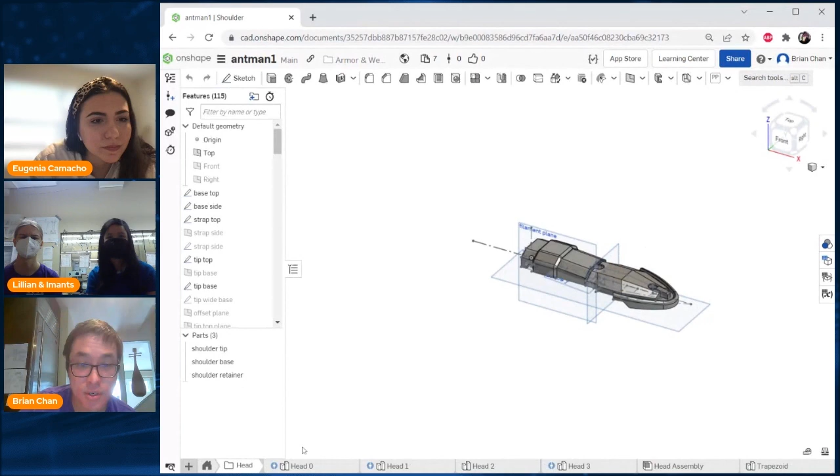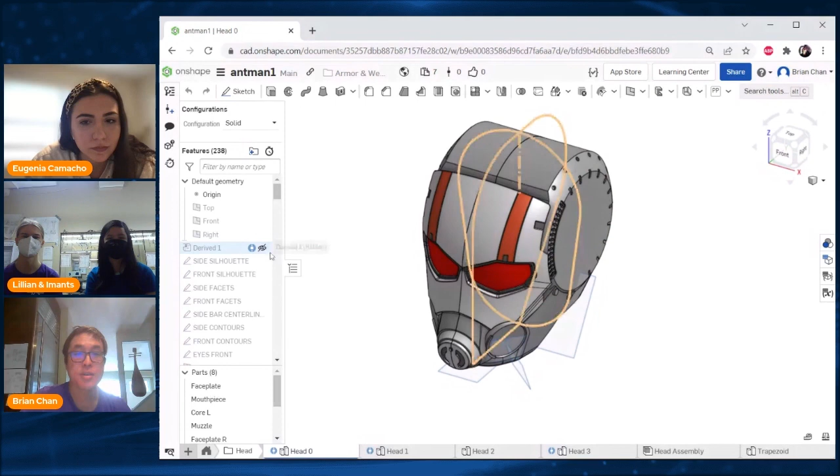So this is a little piece of hardware that fits on his shoulder. I have them in different folders. This is the overall assembly. And I've split them up into multiple part studios because there's just so much stuff, like visual greeble is what they call it in the movie industry. So if you look here, they'll just highlight as they go, right?

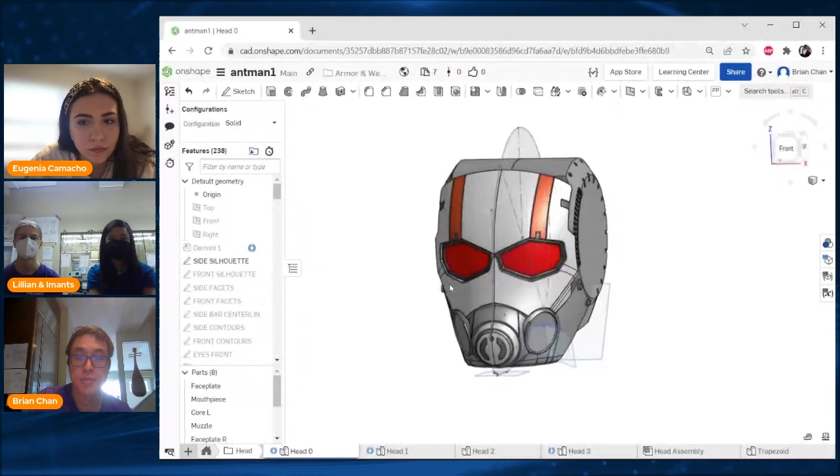So I have very simple starting forms. This is the side view, the front view, and then I call them facets, which is sort of like the lines that make up the shape. That would include like ridges, and later on I'll have a drawing for the eyes as seen from the front.

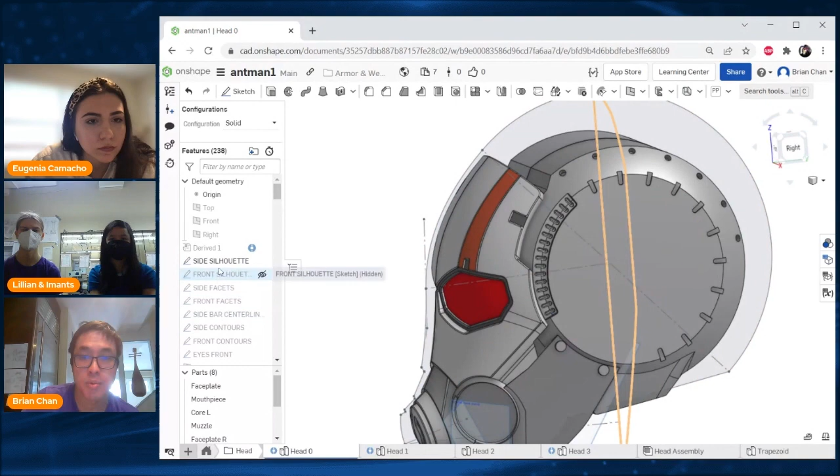So by going from 2D into 3D rather than trying to form 3D curves as composites early on, I can see at a glance early on in these early sketches whether it matches up to the proportions I want. And then only later do I worry about how do I loft it, how do I extrude things, and offset little details like this. Early on, these details are not even in the drawings.

This is an approach kind of like how they used to teach how to draw things, like animals—you put in the simple ovals and the backbone first, and worry about the details later. I'm trying to apply that approach to how I CAD.

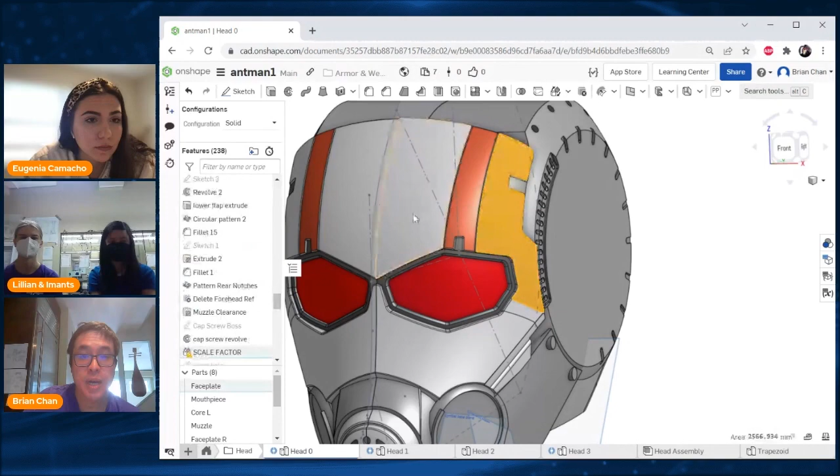And what ended up being the most challenging part to design for this helmet? I'd say it's this mask front faceplate. In the original concept, it's a very smooth forehead, but then there's this very distinct ridge in the middle. I tried to make it as one shape, but since the surfacing tools generally need up to four edges, it's either tangent or it's not.

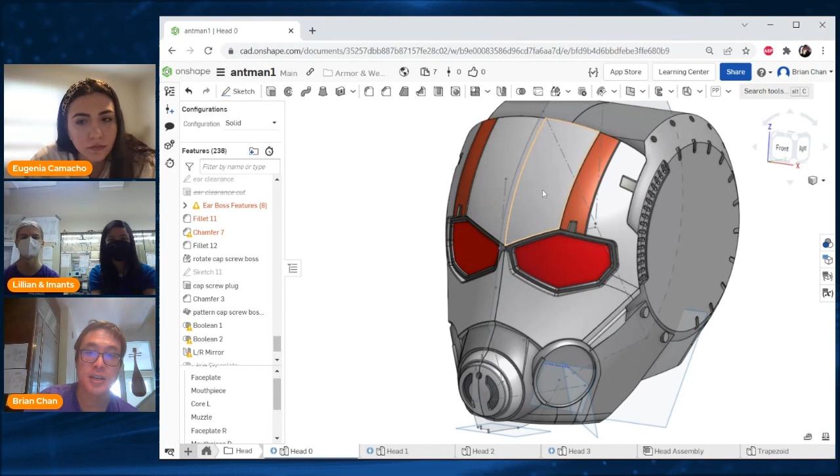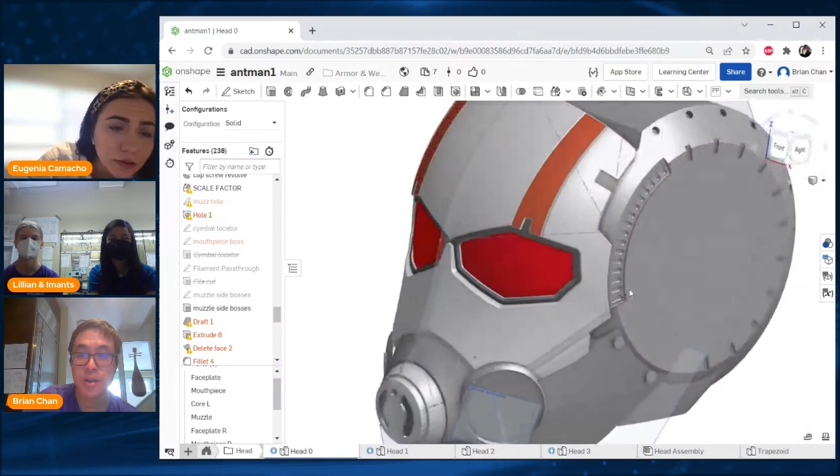I realized I had to split it, but I was able to hide that seam right here with this fillet—when you hide the edges, it's invisible. All the other ones are actually a bunch of shapes, but they're not difficult shapes—surfaces of revolution, and a bunch of extrusions and stuff. But yeah, that main shape was hard to do.

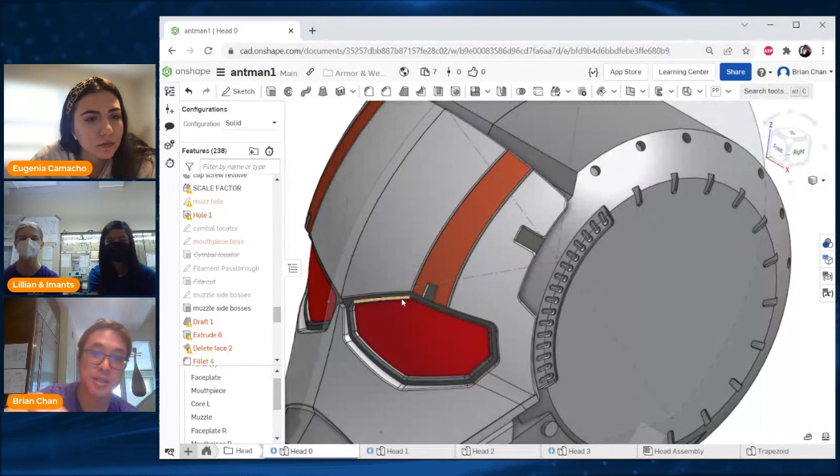And then other things are like, I could create surfaces and then thicken them and subtract that surface in order to create a recess for the eyes, etc.

This is amazing. I'd like to open it up to Richard and Michael if you have any more questions for Brian and his design.

Yeah, this is fantastic, Brian. Thank you so much for sharing it. I love your analogy of the books you use for illustration—I think that's a great approach when it comes to this kind of complex work, and that's really good advice. It really is a sophisticated thing; it's smart to have multiple part studios and derive things. These are techniques that are valid not only in Onshape but in other systems as well, so they're also very good techniques. Thank you for sharing this.

Richard, are you ready to get yourself one of these? You gonna wear it around the Vegas Strip? I wouldn't look out of place wearing it around here—this is Las Vegas after all.

Brian, I'll just reiterate what Michael said about your approach to surfacing. I've spent years trying to learn how to do real surfacing—I'm a mechanical guy, big chunks of steel and socket head cap screws—but one of these days I'm going to finally figure it out, and I'll take some of that advice you gave us and work it into my approach. Thank you for that.

Thanks. Well, one of the things about this helmet is that since I used to design in a mesh modeler, kind of similar to Blender, you can make incredible detail doing things in software like that. But with Onshape, it's actually a mechanical engineering program, so I'm able to put in socket head cap screws, and that's how this thing is put together. It's incredibly modular and still engineering precise, and that allowed me to make the helmet flipping mechanism pretty easily integrated into the design. So it's really the best of both worlds.

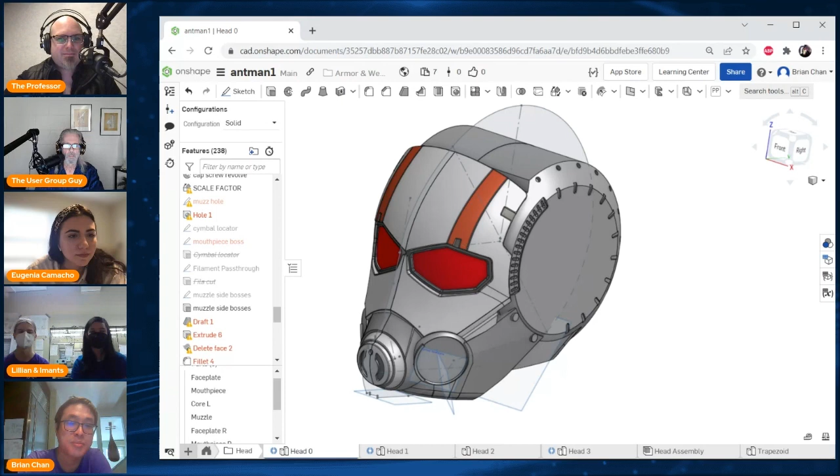Just wonderful, thanks again Brian. That's an amazing design—we love the creativity showcased here, not only in the result but in your design process. The approach you took is very unique, and that was well deserved—you won this category. Congratulations for that.

Congratulations. Now, the assembly design category was focused more on looking at the build materials and whether the design showcased complex and realistic motion in the assembly, and boy, did they do that with this assembly. I want you guys to talk a little about the Octocanum design, but I also want to highlight that you didn't just win one category, you also won Best Student Design—so congratulations for both. Please explain.

I know you're both students, so I'd love to hear a little bit about where you study, what you're studying, and also tell us about your design.

Yeah, so we're both students at Garfield High School in Seattle. I'm a senior, graduating this year, heading to the University of Washington. And I'm a sophomore, so still got 2 years in high school.

We've been working together on CAD projects and mechanical projects from our robotics team, through FIRST, which is a global nonprofit organization that organizes robotics competitions. We thought it would be a cool project to both develop our CAD skills and participate, and get to see what other people are doing in the Onshape design competition, if we attempted to make from scratch a complex type of drive base that isn't really seen much in the robotics competition we participate in. So do you want to pull up the CAD model?

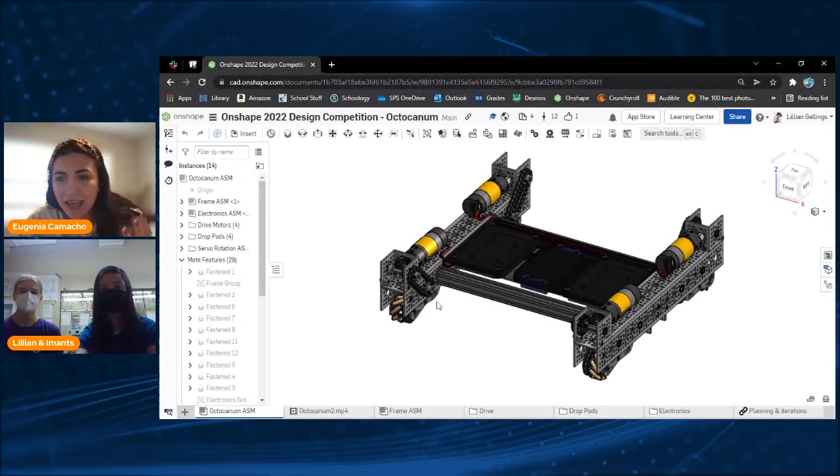I think it's fantastic that you're both involved in FIRST, but can you tell us what a Mecanum drivetrain is and why this one is so different from others in FTC, the First Tech Challenge?

A Mecanum drive base fundamentally uses wheels that have slanted rollers. There's a bunch of rollers spaced around the outside of the wheel, set at 45-degree angles. When you drive the wheel forwards, it actually outputs a diagonal vector of force. By combining 4 of them at different angles, running them in parallel and having them output force vectors in different directions, you can get a robot that moves not just forwards and backwards, but can also turn and strafe, moving side to side in any combination of those 3 degrees of freedom.

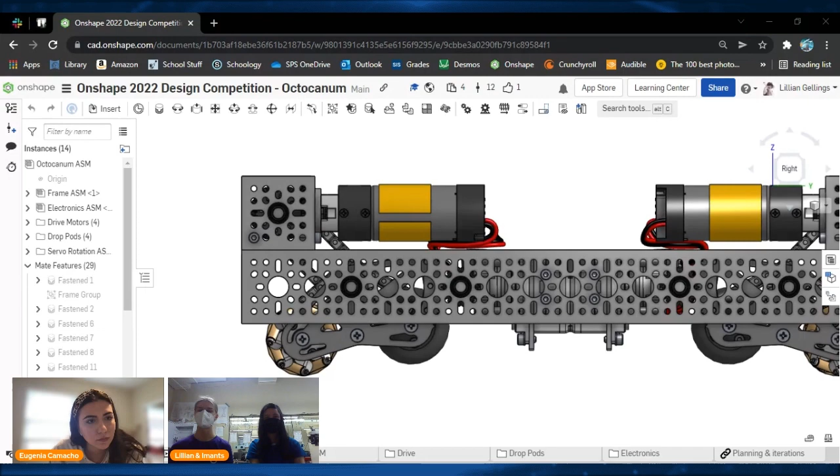That's really good for holonomic movement, where you can control your position along 3 axes, but it's not so good when you run into things like terrain. If you need to drive over bumps, especially sideways, these wheels aren't effective at that. Forwards and backwards, they don't have as much traction because these rollers can slide forwards and backwards.

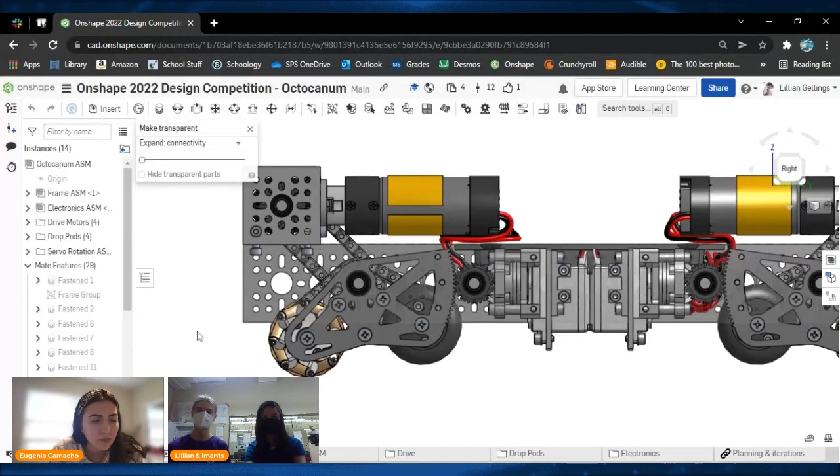Our approach was to add a second set of wheels that you can actuate downwards mechanically. Those wheels have regular traction-based surfaces, like a car wheel, or here more like a skateboard wheel. The idea is you can toggle between the 2 states and either have lots of mobility and high speed, or more terrain capabilities and more traction.

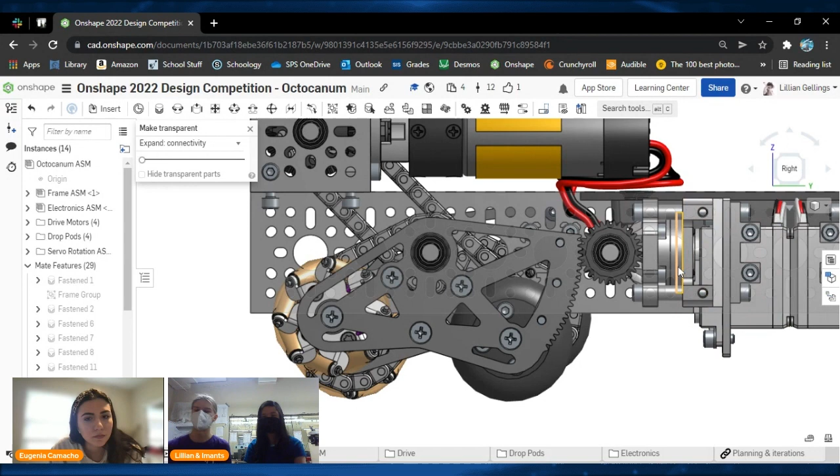It's actuated by a servo over here to the side, and the servo goes through a non-back-drivable mechanism called an overrunning clutch. The reasoning is that when it's in either state, the robot needs to be able to stay in that state without the wheels getting pushed back up into the robot. One of the challenges was packaging all of these complex mechanisms together in as compact a space as possible.

Absolutely. And go ahead, Lillian. Sorry. Oh no, cool.

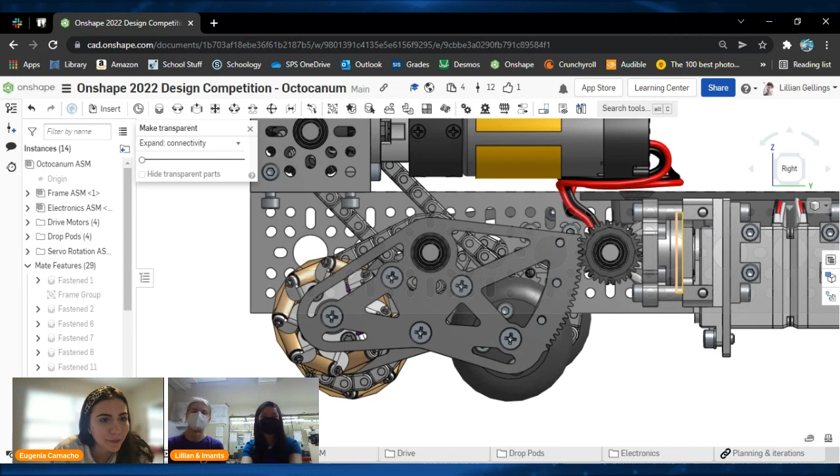This was a team design. I'd love to hear, Lillian, what you focused on, and Imants, what you focused on as you collaborated through this design. Yeah, we collaborated on most aspects of this design.

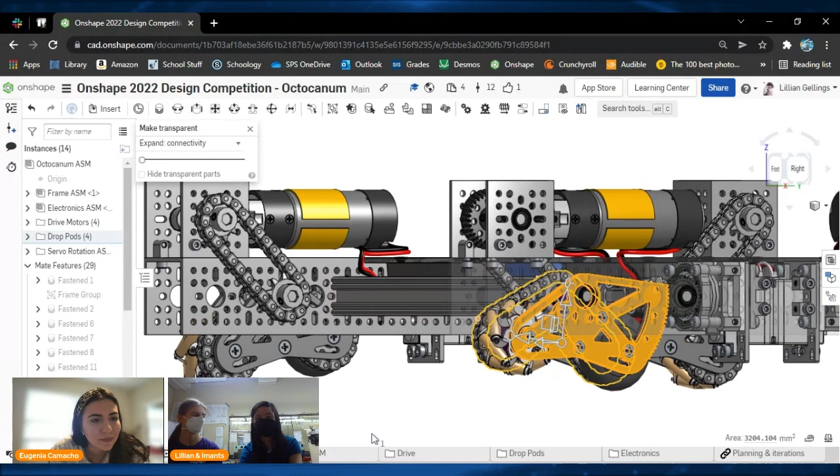We went through a lot of versions of this drop pod, different versions where we were using belt or chain, and also changing the way we shifted the octocanum modes. I also worked on CADing the gears using Evan's new feature script.

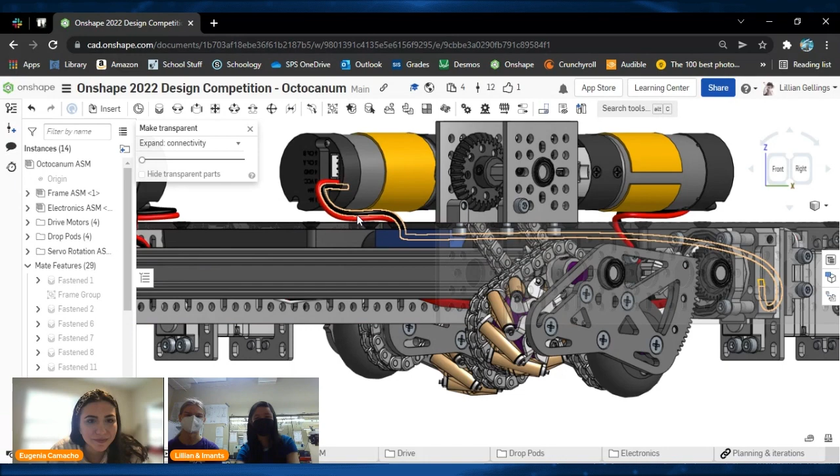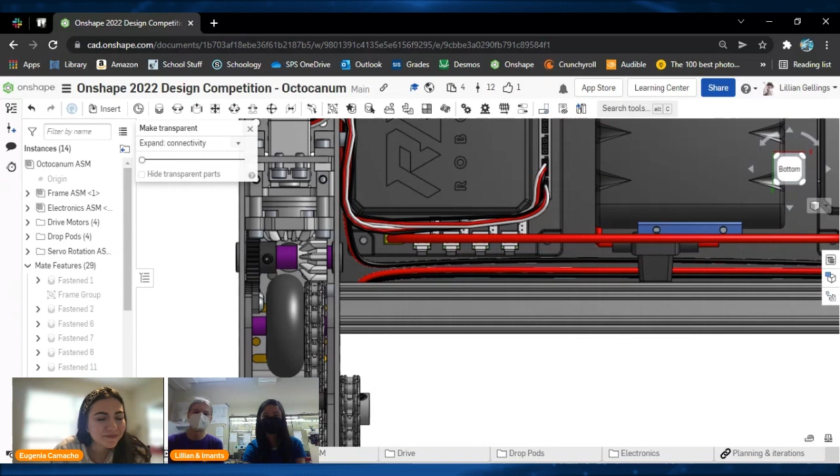The freeform spline feature script made CADing the wires a lot easier. In the past, I was incredibly impressed by Evan Reese's submission for the feature script. The freeform spline makes wire CAD go from the most awful, obnoxious thing in CAD ever across all softwares to something that's reasonable and easy, not too difficult. We could throw this together, and I think we did the wires in an hour or 2 to get full wiring for something like this, where it's not just simple straight pathways. You can get realistic pathways and figure out where wires are actually going to run in your final model.

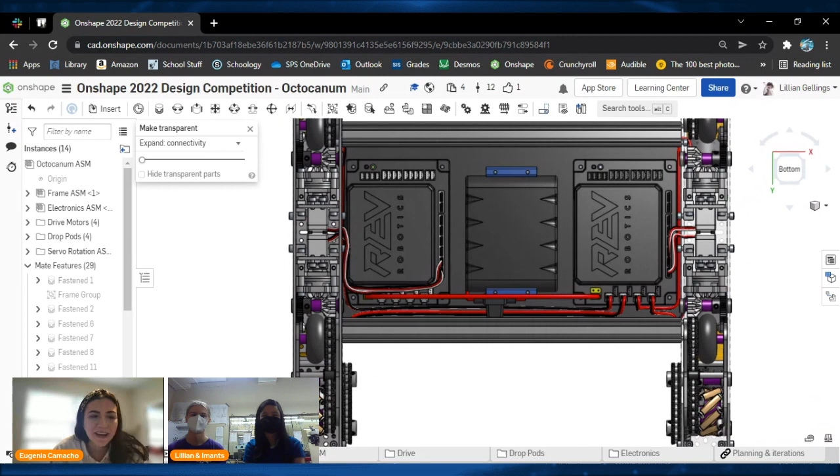And so the freeform spline feature was like an integral part of the process. I love it. We should have Evan Reese come in again and talk about his winning design as well, and just talk about custom features as a whole. I think they're so rich and important in design.

So I absolutely love the shout out and the usage there. I'm aware that you are building this now, correct? Have you started building this design in real life? How far out are you? I know you said in your submission that some of these parts were going to be laser cut, others going to be 3D printed. How far are you in the actual production of this?

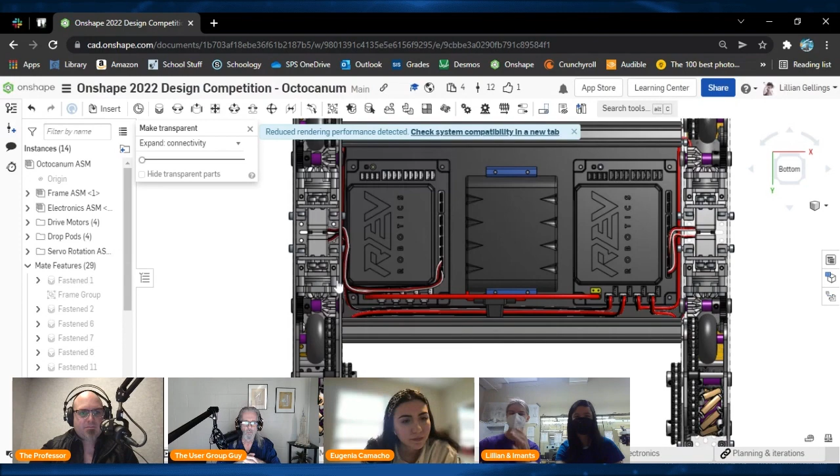Yeah, so we've started development for some of the sub-mechanisms, like the most important one being the custom wheels. The Mecanum wheels in this design are a lot smaller and more compact than ones traditionally available on the market. So we had to design fully custom Mecanum wheels from scratch that would fit our specs and also have the load capacity we needed. For that, we actually wrote a custom feature that calculates the roller geometry along the top of the outside. It was a little bit more complicated than just projecting a cylinder onto an angled sketch.

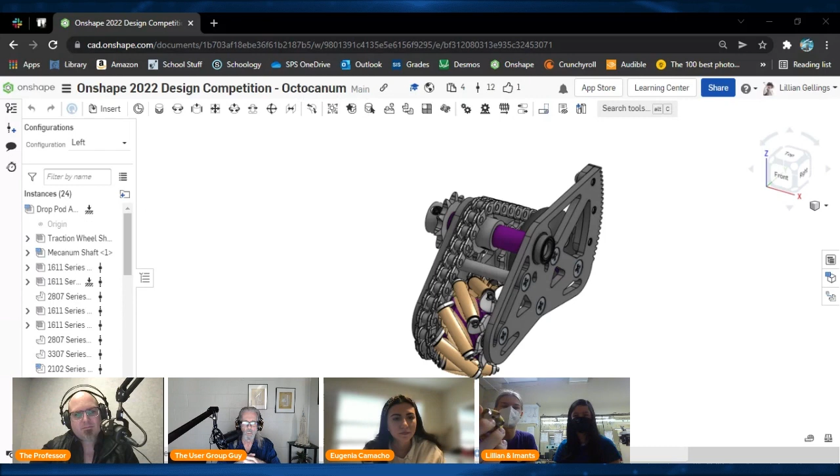But here we have one of the Mecanum wheels that's under construction, and you can see this pretty closely matches what we have in the CAD model. It has a bunch of cast polyurethane rollers with steel tubing as a core to give it strength that run around the edges. Each houses small, I think 2 millimeter inner diameter bearings - so that's MR2-5ZZ, 5mm outer diameter, 2mm inner diameter, on steel pins for shafts. The whole thing has bearings seated on the inside, which means we can mount it a lot more compactly, with just a stationary standoff for the axle rather than an entire rotating axle. We just directly mount things to the Mecanum wheel and cut out some stuff from it.

Yeah, custom wheels.

That's amazing, that's amazing. I know Richard and Michael have joined us. So yeah, I mean this is, once again, congratulations Lillian and Imants. How long have you been using Onshape?

I started 3 years ago, I think, my sophomore year, and I haven't looked back since. We were using Autodesk Inventor, and while it's a powerful piece of software, collaboration is just not the same as with Onshape. Let's say that. Yeah, so I've got about 3 years under my belt.

Yeah, I actually started when I was a freshman, like 1.5 years ago. I was mostly mentored by Imants and really enjoy using Onshape.

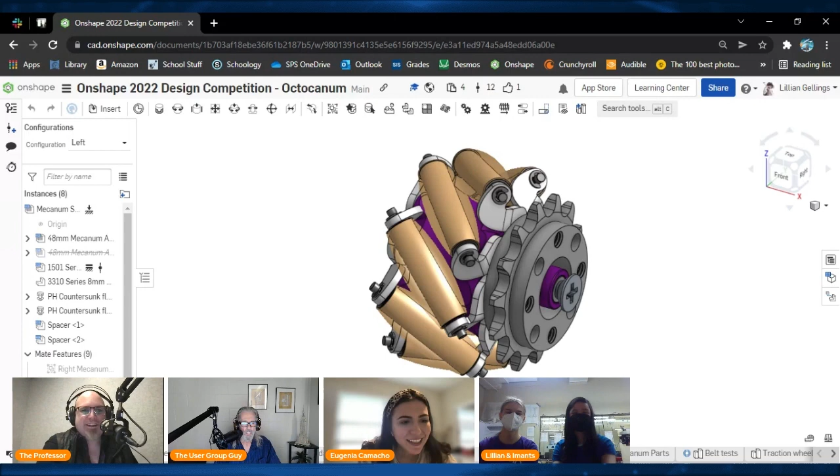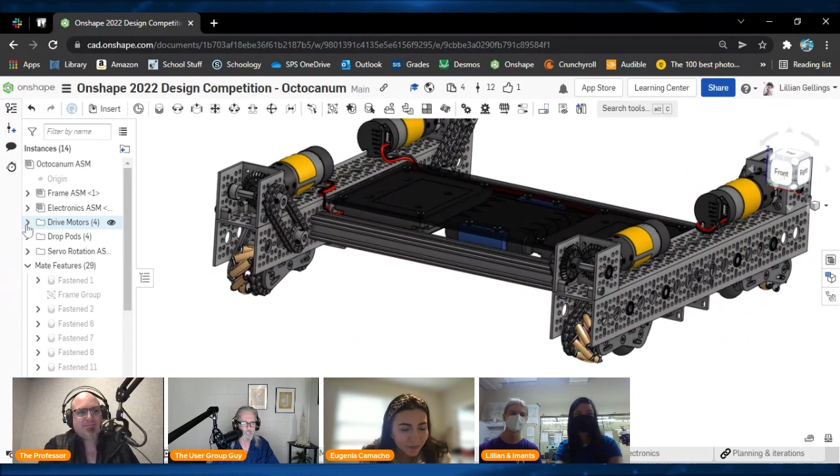Awesome. It's obvious, I mean this is a great design. It's so detailed and revolutionary, no pun intended, wheel design here. I wonder why all vehicles don't have this type of drive now. But this is really awesome. And the CAD model itself, I mean this one gets my heart racing because I saw gears and chains and steel, and I'm pretty sure I saw some socket head cap screws there too. But I look over at your feature tree or assembly tree, and I see things that are named, and things that are in folders, and I think wow, that's great organization, especially for collaboration. You're trying to get other people to work on your designs, and they need to understand what's going on, and that's one of the ways to do that.

So congratulations, Lillian and Imants, on a great design and on a great win. Thank you.